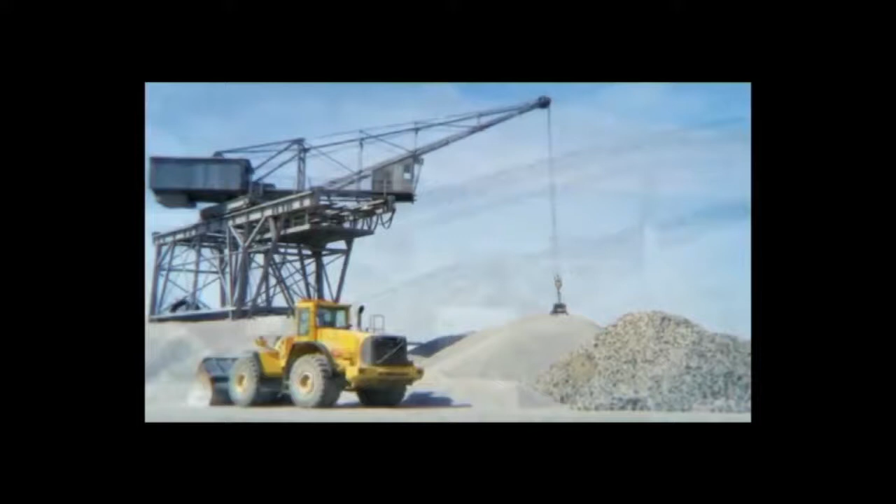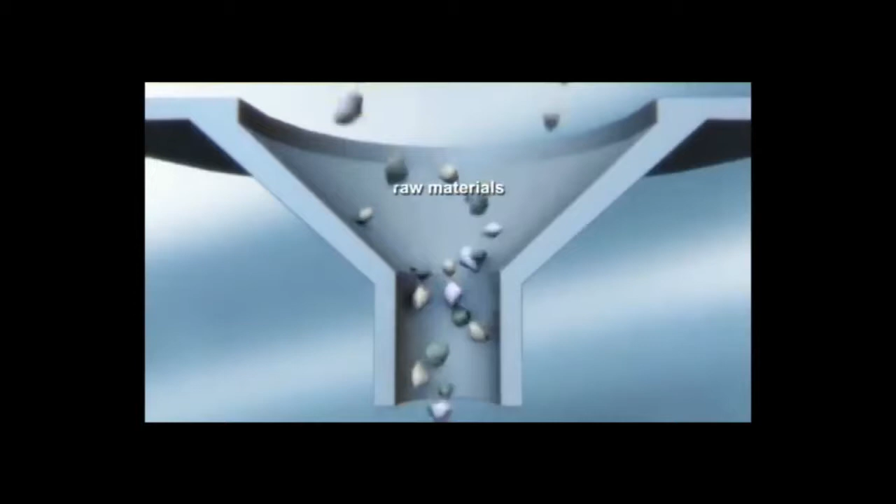The feedstocks used for the manufacture of cement are the natural raw materials limestone and clay. These are broken down in crushers into fragments of about 1 kilogram and then ground in a raw mill, together with smaller amounts of iron ore and quartz sand to obtain a fine meal.

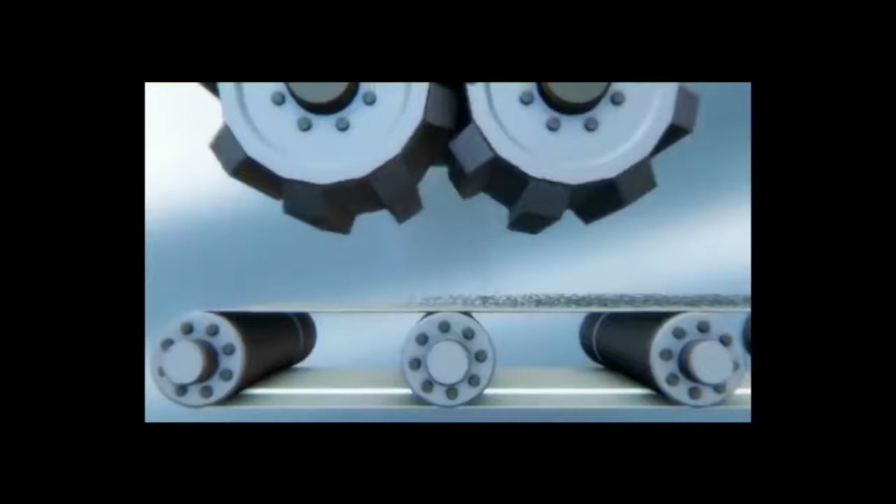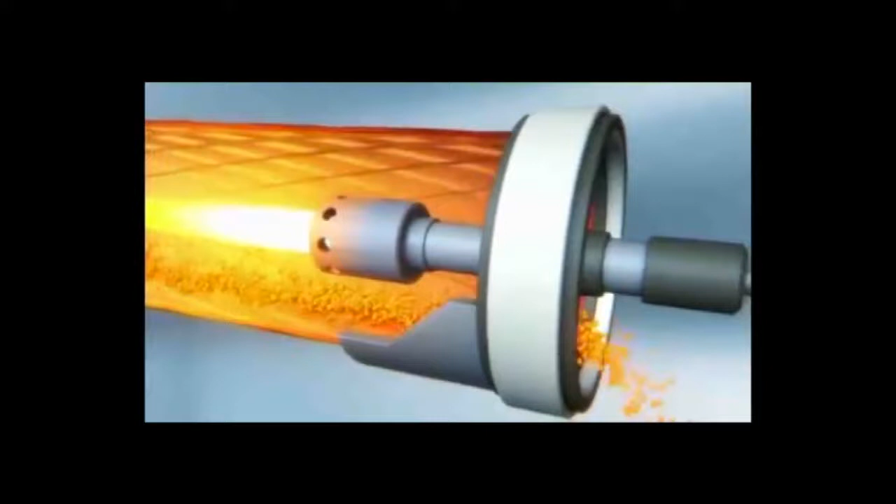At the same time, they are dried with the hot kiln exhaust gases from the incineration process. This raw mix is then transferred to a rotary kiln and fired at temperatures of about 1450 degrees Celsius to produce round-like particles measuring about 3 centimeters, known as cement clinker. Sintering is the name used by experts to describe this important process, which needs an enormous amount of energy.

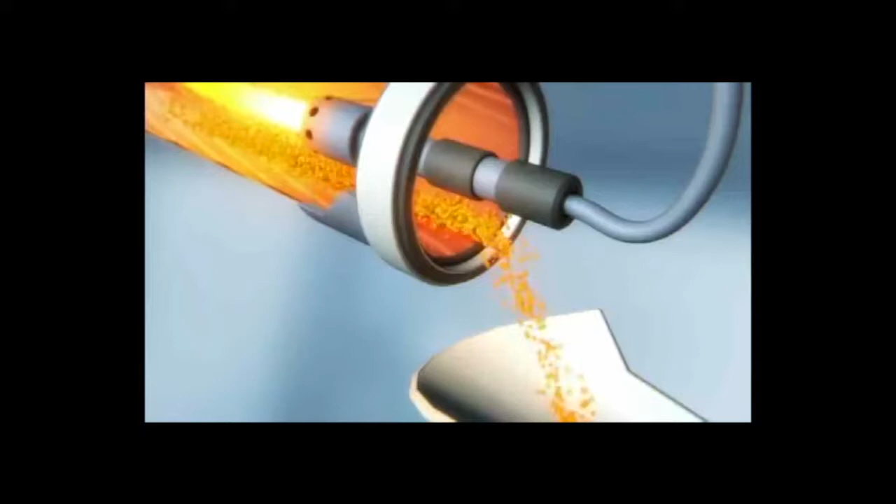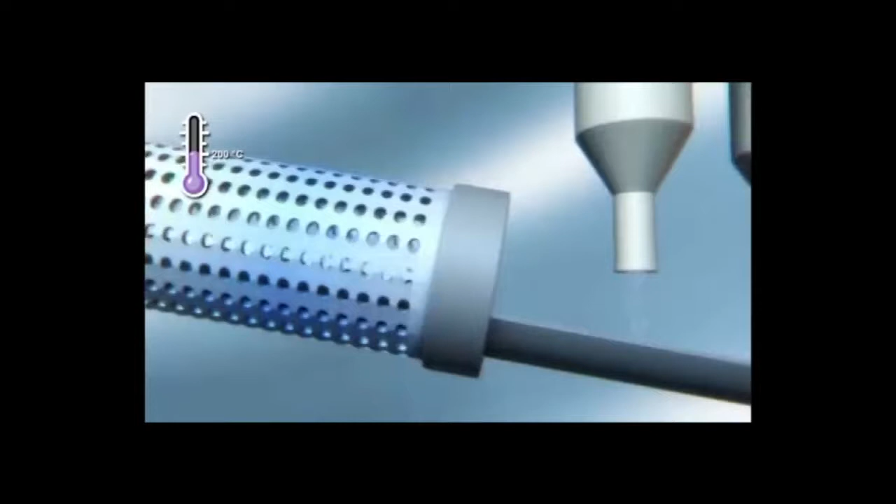In this incineration process, chemical compounds are formed which later cause the cement to harden when mixed with water. After the incineration process, the cement clinker drops out of the kiln and is cooled to about 200 degrees Celsius in a grate cooler. After adding gypsum or anhydrite and sometimes further ground additives like slag, fly ash and limestone,

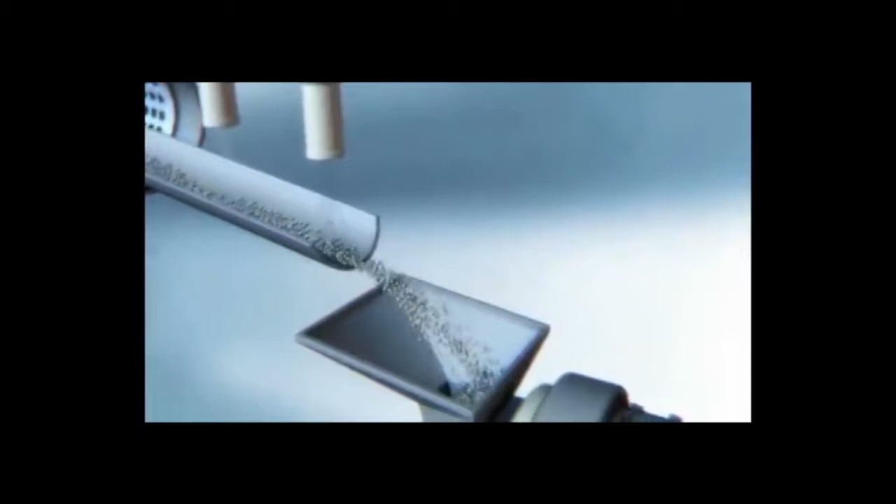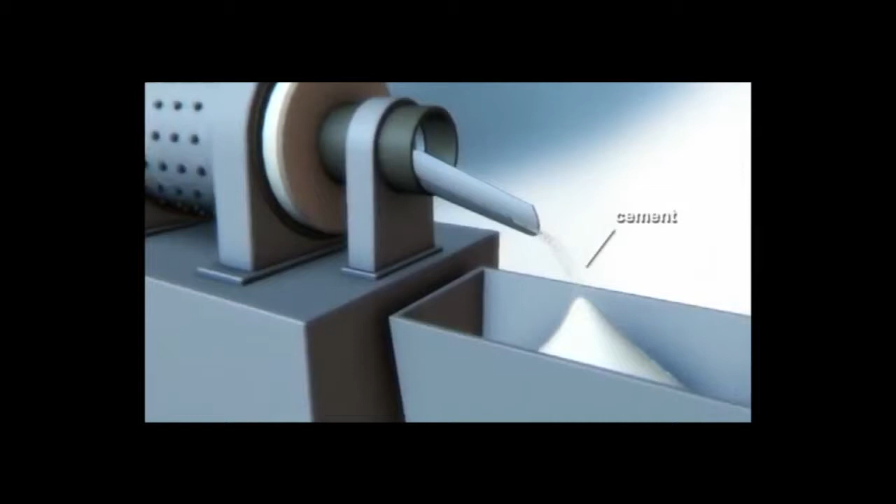the clinker is ground in mills to produce fine cement. The quantity and type of the additives influence the chemical and physical properties of the cement. The cement is stored in silos and is mostly supplied to concrete manufacturers as bulk material for further processing.

Concrete consists mainly of a mixture of cement, water and aggregates such as sand, gravel and crushed rocks. At the concrete manufacturing plant, the cement powder from the storage silo is transferred to the mixer. All the concrete components are weighed exactly before being added to the concrete mixer for a specified time.

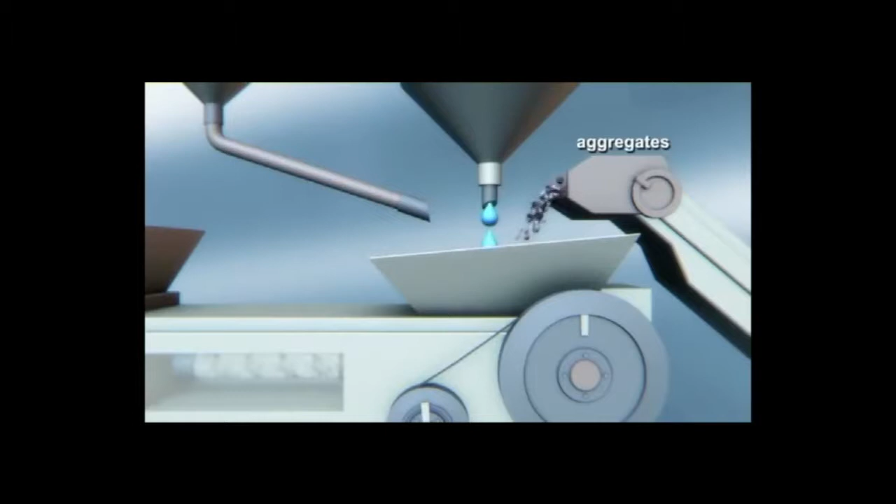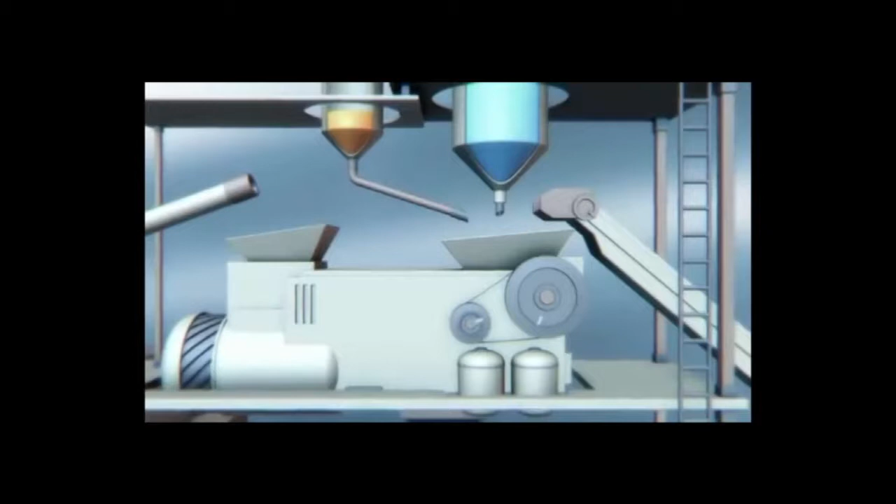Finally, the chemical admixture like the superplasticizer Glenium is added. In this process, the cement water mixture slurry becomes the glue, also known as cement paste, that holds the aggregates together. The fresh concrete mass then flows into mixer vehicles to be transported to the construction site.

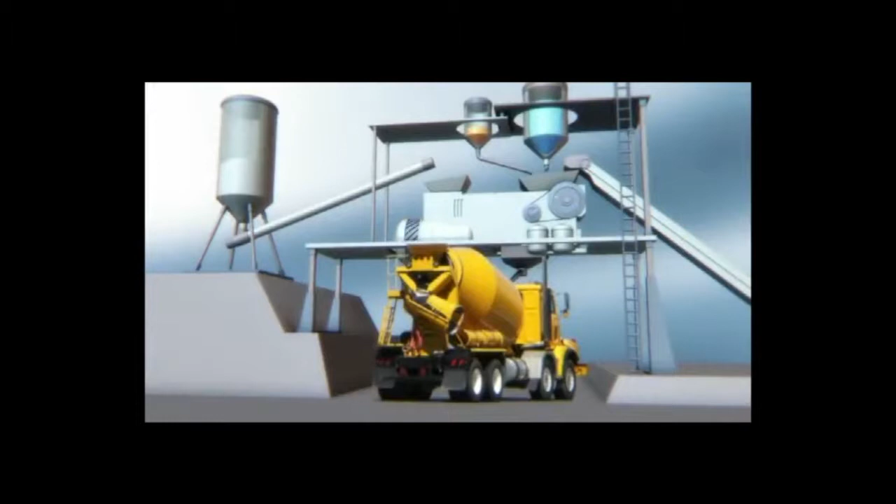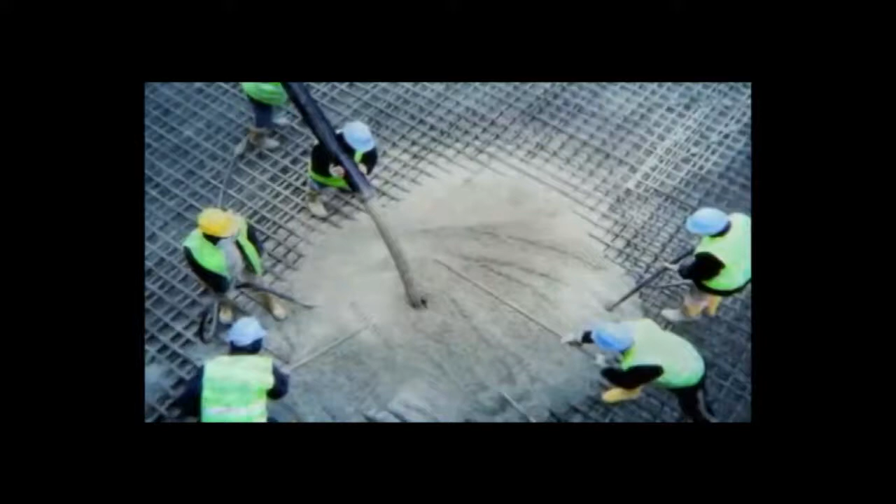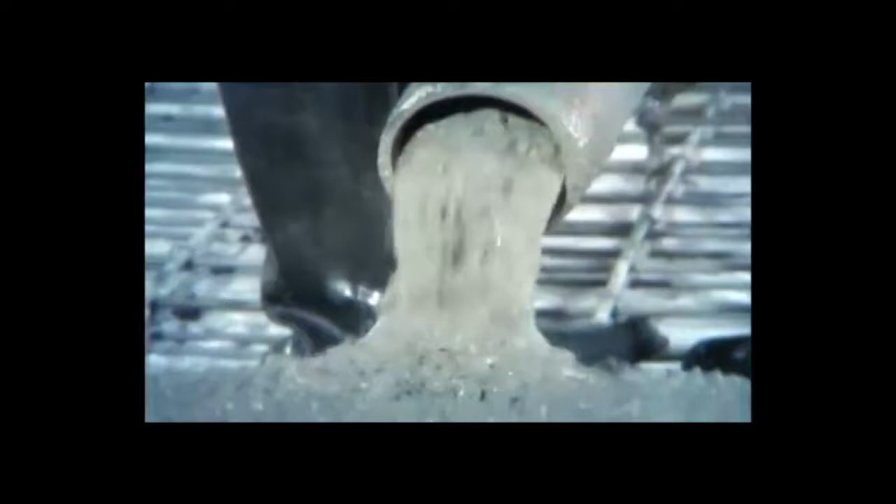The properties of concrete can be specifically varied by using different mixture proportions and admixtures. The admixture Glenium, for example, increases the flowability of the concrete so that the densely packed steel reinforcement bars of a foundation can be coated quickly and completely with concrete within a short time.

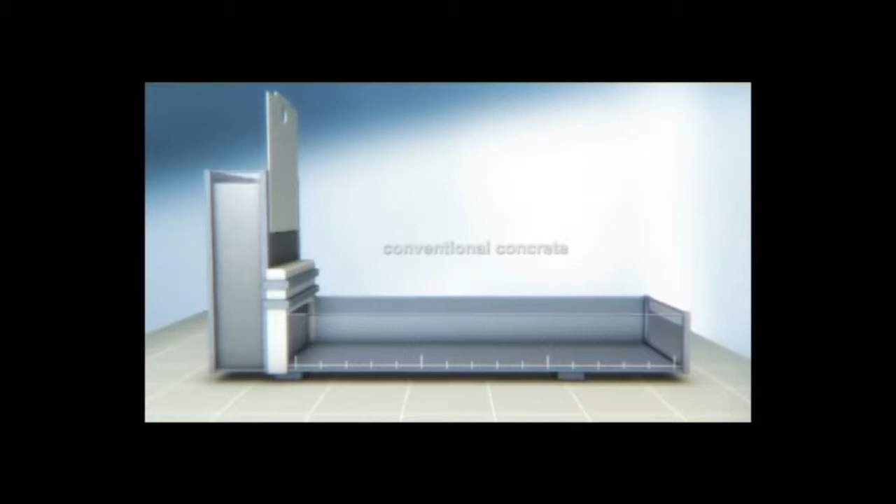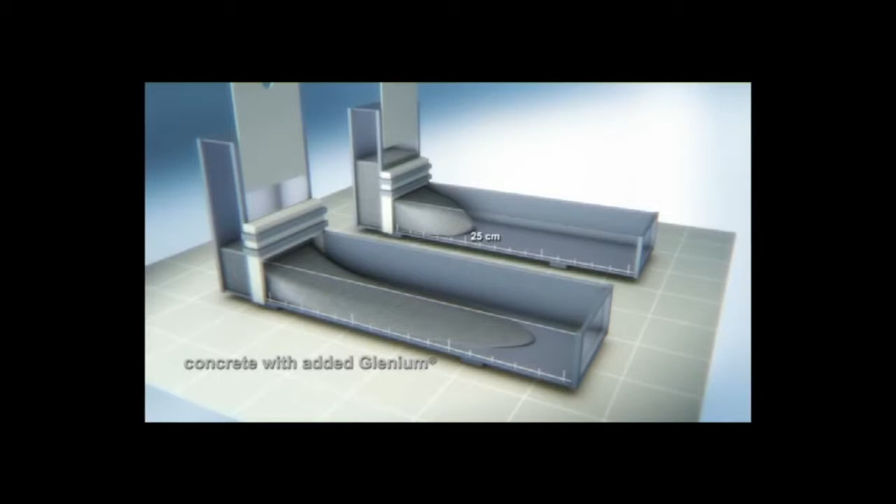A pilot plant comparative study between conventional concrete and concrete with added Glenium, but with the same water content and mixing ratio, clearly shows: with conventional concrete, the flow process already stops after 5 seconds and after a distance of about 25 centimeters. Concrete to which the superplasticizer Glenium was added flows much faster, and the distance travelled over the same period is about 65 centimeters.

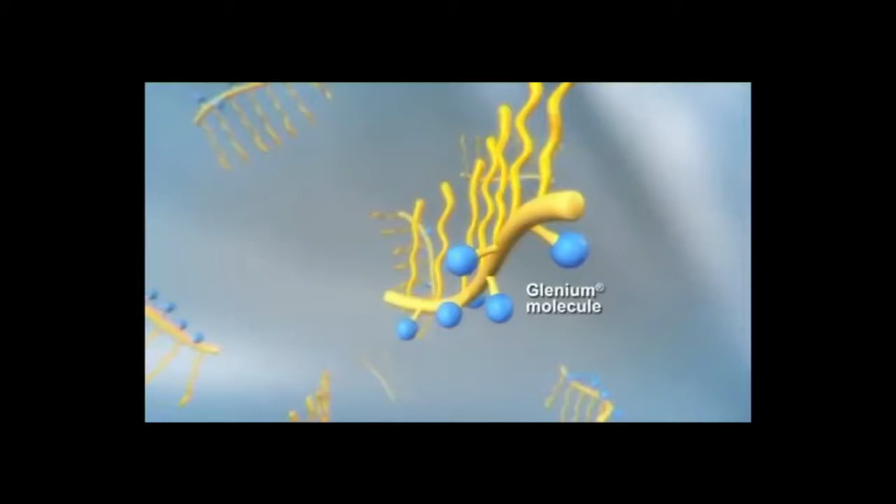Modern superplasticizers like Glenium are based on synthetic organic polymers such as polycarboxylate ether, called PCE for short. A PCE molecule consists of one long main chain and shorter side chains. The main chains are negatively charged.

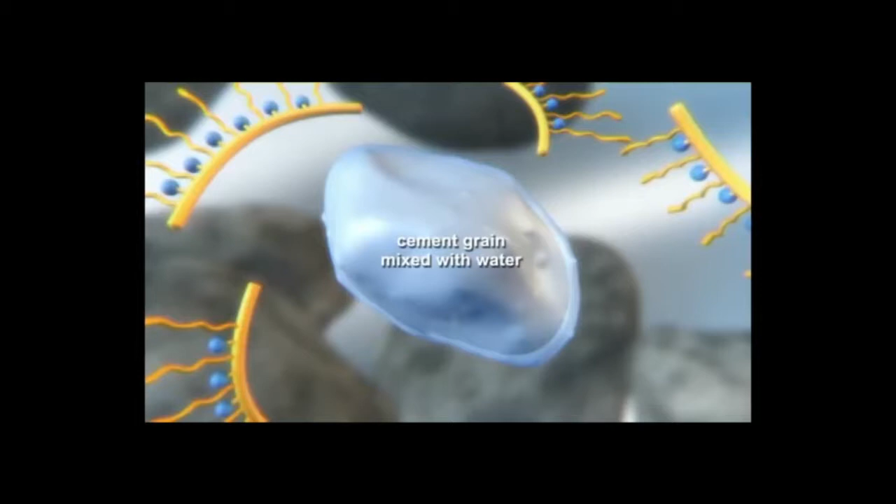When cement is mixed with water, it reacts and starts to form crystalline needles that interlock with each other to form a hard, rock-like substance. When the PCE molecules are mixed with liquid concrete, they are adsorbed onto the surfaces of the particles contained in the concrete. The side chains of the molecules point outwards, like the spines of a chestnut burr, and hold the particles at a distance to each other.

This makes it easier for them to move against each other, and the concrete becomes more fluid. Concrete can be given the desired properties by varying the length of the main and side chains.

BASF, the chemical company. Yes, I think it's a very nice movie. In just 5 minutes, you have the overall view starting from the cement production into the concrete, and then you end with the mixture. Have you understood everything?

Do I need the microphone? Yes? That's better?

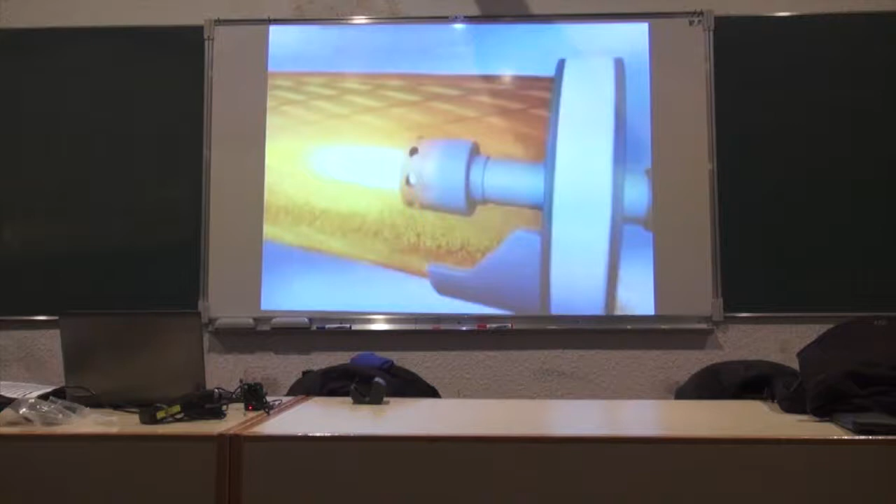The feedstocks used for the manufacture of cement are the natural raw materials limestone and clay. These are broken down in crushers into fragments of about 1 kilogram and then ground in a raw mill, together with smaller amounts of iron ore and quartz sand to obtain a fine meal. At the same time, they are dried with the hot kiln exhaust gases from the incineration process. This raw mix is then transferred to a rotary kiln and fired at temperatures of about 1450 degrees Celsius to produce round-like particles measuring about 3 centimeters, known as cement clinker. Sintering is the name used by experts to describe this important process, which needs an enormous amount of energy.

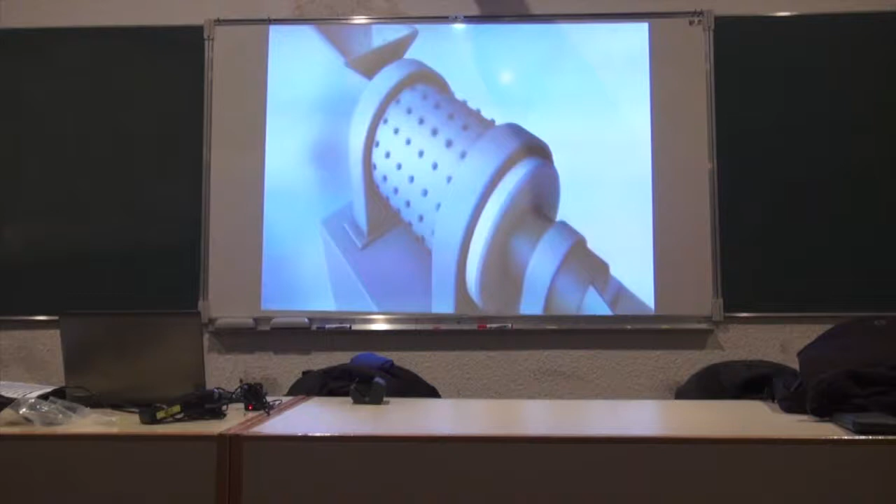In this incineration process, chemical compounds are formed which later cause the cement to harden when mixed with water. After the incineration process, the cement clinker drops out of the kiln and is cooled to about 200 degrees Celsius in a grate cooler. After adding gypsum or anhydrite and sometimes further ground additives like slag, fly ash and limestone, the clinker is ground in mills to produce fine cement. The quantity and type of the additives influence the chemical and physical properties of the cement. The cement is stored in silos and is mostly supplied to concrete manufacturers as bulk material for further processing.

So, let's start with the first question. What are the two natural materials used for the manufacture of cement?

I think, yes, the natural materials, the raw materials. Clay, I think it's also better. Then we will do a little one at the end for the note, but it's good also to exchange like this. So, clay, and clay is argile. And limestone.

Lime, something there is not wrong, it's true even, but that was not in the raw materials that we put in the clinker. I've heard about gypsum, and you're right, you're correct. Gypsum is also a natural material used for cement manufacture. It's used for regulation of the setting of the cement. So these are the words you need to understand and keep in mind: the setting of the cement. So gypsum is used as a regulator for the setting of the cement, but in the clinker we are using two raw materials.

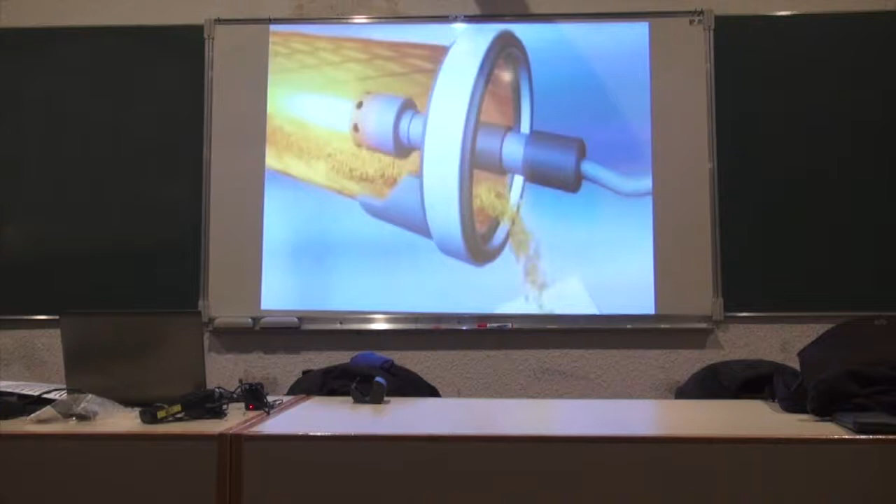This raw mix is then transferred to a rotary kiln and fired at temperatures of about 1,450 degrees Celsius to produce round-like particles measuring about 3 centimeters, known as cement clinker. Sintering is the name used by experts to describe this important process, which needs an enormous amount of energy. In this incineration process, chemical compounds are formed which later cause the cement to harden when mixed with water.

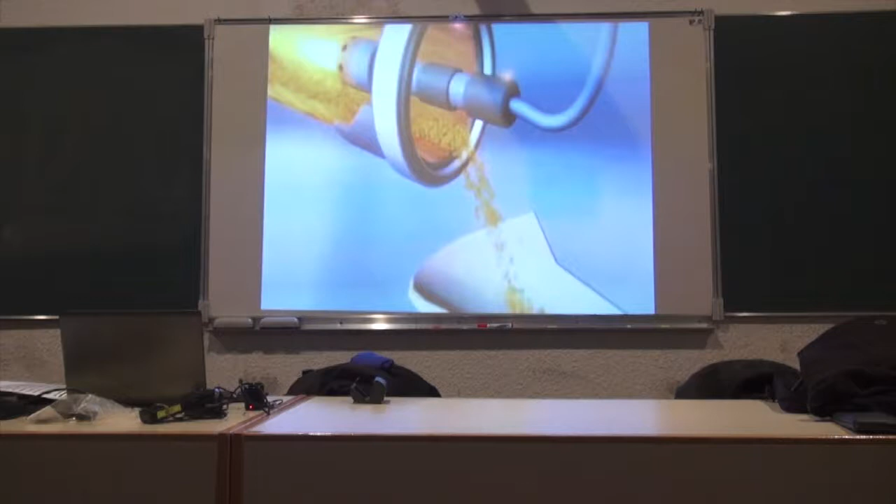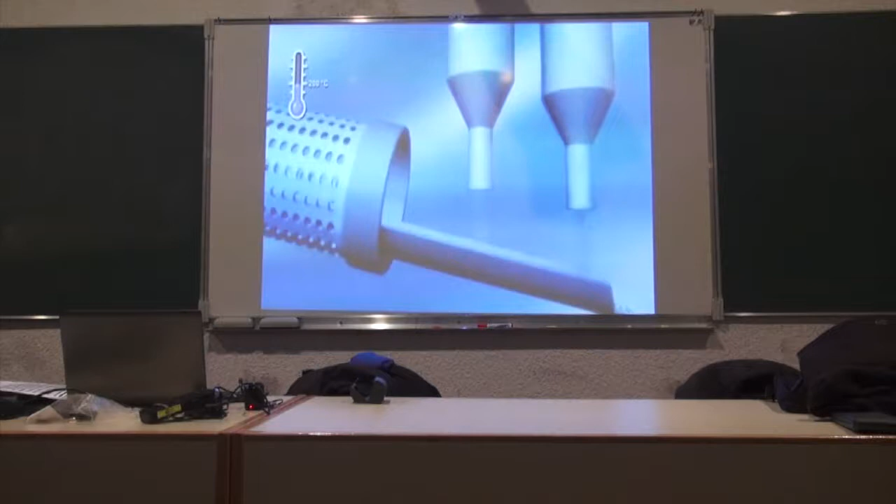After the incineration process, the cement clinker drops out of the kiln and is cooled to about 200 degrees Celsius in a grate cooler. After adding gypsum or anhydrite and sometimes further ground additives like slag, fly ash and limestone, the clinker is ground in mills to produce fine cement.

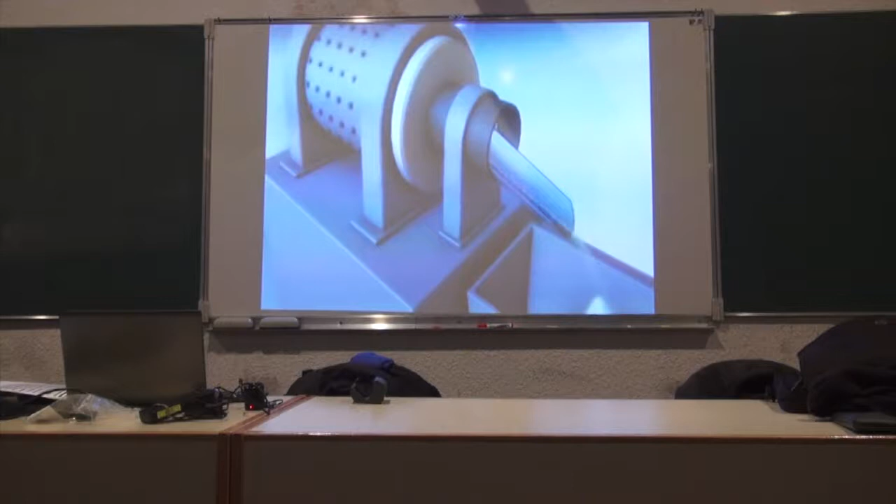The quantity and type of the additives influence the chemical and physical properties of the cement. The cement is stored in silos and is mostly supplied to concrete manufacturers as bulk material for further processing.

Are you ready to go to the concrete plant now? The batching plant, concrete batching plant, ready-mix concrete, aggregates. Let's see all this.

Concrete consists mainly of a mixture of cement, water and aggregates such as sand, gravel and crushed rocks. At the concrete manufacturing plant, the cement powder from the storage silo is transferred to the mixer. All the concrete components are weighed exactly before being added to the concrete mixer for a specified time. Finally, the chemical admixture like the superplasticizer Glenium is added. In this process, the cement-water admixture slurry becomes the glue, also known as cement paste, that holds the aggregates together. The fresh concrete mass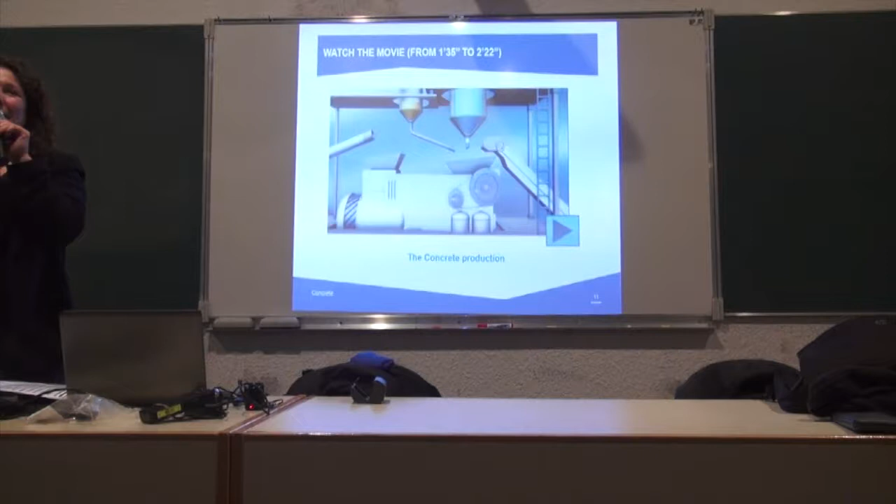Concrete consists mainly of a mixture of cement, water and aggregates such as sand, gravel and crushed rocks. At the concrete manufacturing plant, the cement powder from the storage silo is transferred to the mixer. All the concrete components are weighed exactly before being added to the concrete mixer for a specified time. Finally, the chemical admixture like the superplasticizer Glenium is added. In this process, the cement-water mixture slurry becomes the glue, also known as cement paste, that holds the aggregates together. The fresh concrete mass then flows into mixer vehicles to be transported to the construction site.

What are the three materials considered as aggregates? I have the three, I would just add a fourth one that is not, but thank you. Gravel, sand, and crushed rocks. Thank you, great. Again, there is a fourth one that is not

as aggregate, that is not in this movie, and we will talk about it. Thank you, madam. I wanted to speak about recycled concrete. Very good, we will talk about this after with the circular economy - reusing what has been deconstructed or demolished, into the concrete again. That will be another kind of aggregate called recycled concrete. Thank you.

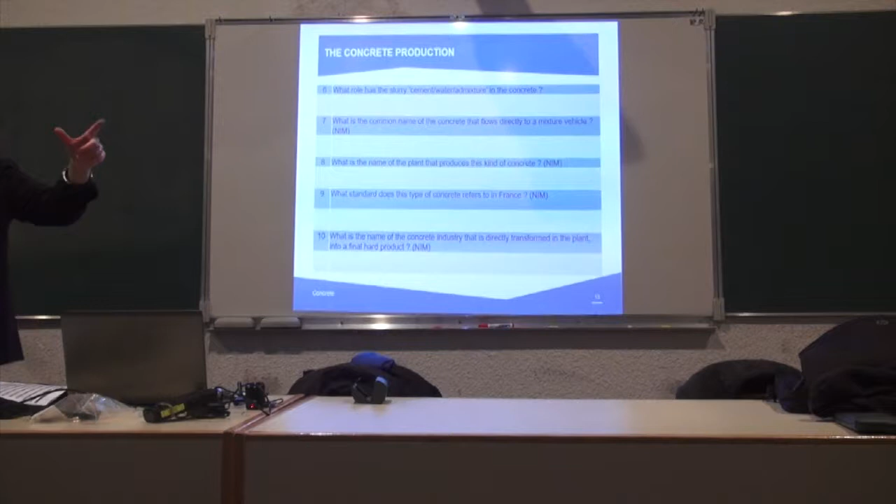Slurry. With cement you can do concrete, mortar, and slurry. If you have only cement and water, it's a slurry, an admixture, un coulis — une pâte de ciment, un coulis. Slurry, c'est barbotine aussi, c'est aussi le mot barbotine. Slurry, c'est pour tout, par exemple les coulis d'injection. So that is another important word.

If you go on consolidation for soils, you will inject some slurry. And what is the role of this slurry in the concrete? To make it glue. And what is the common name of the concrete that flows directly to a mixture vehicle?

In French, it's béton prêt à l'emploi. In English, I say the word many times in order for you to integrate that. Prêt à l'emploi, béton prêt à l'emploi — ready to use. It's really like do it yourself, DIY, but now it's ready mix concrete. BPE pour béton prêt à l'emploi, RMC for ready mix concrete. So if you see on the document RMC, it means béton prêt à l'emploi, like BPE in French.

And what is the name — this word also I repeated sometimes — of the plant where you produce this kind of ready mix concrete? It's a plant. Do you know what is a plant? No? A factory. A plant is a factory, it's a place where we do things. Une usine, a plant.

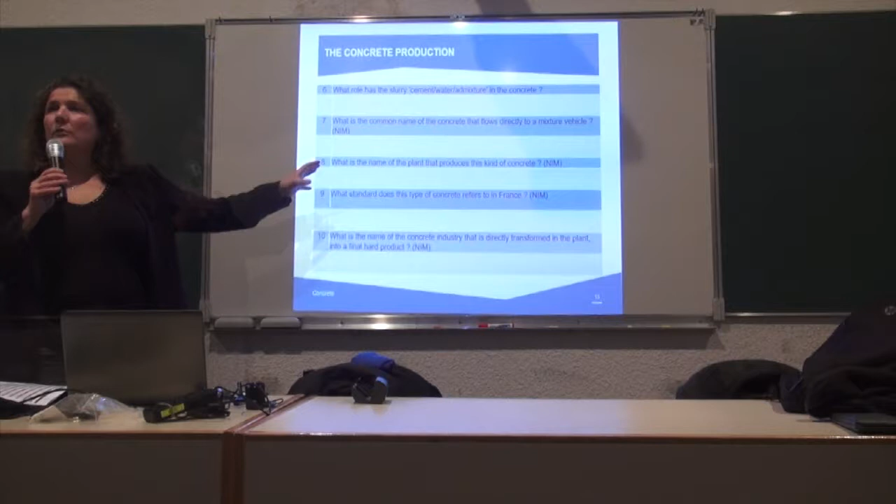So where do we do the ready mix concrete? It is done in a concrete batching plant. These are important words if you want to work in concrete in foreign countries in the future. Ready mix concrete, pour béton prêt à l'emploi, and batching plant is the unit, also called unit of production. Plant, unit, batching plant or batching unit.

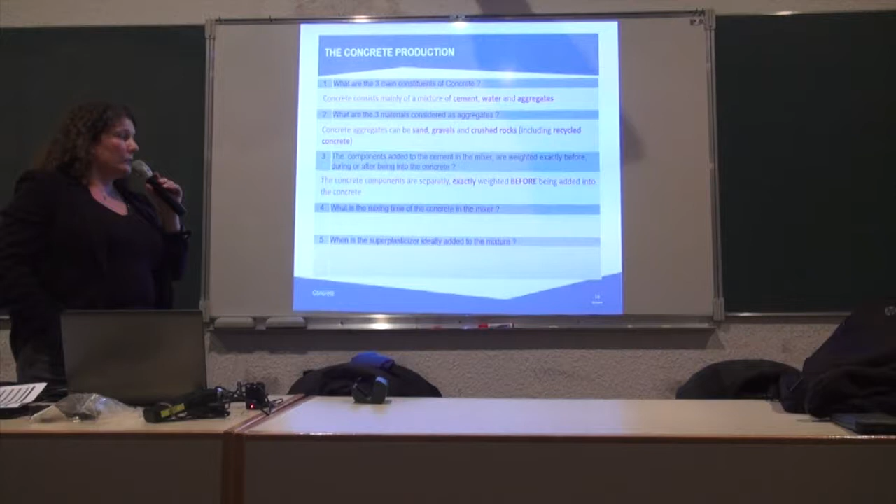The components added to the cement in the mixer are weighed exactly before being added into the concrete. The time for mixing the concrete is a specified time, no universal time. It depends on several factors, including the mix design, the mixer, the power of the mixer, and so on, the size of the aggregates, and many different parameters that will specify your mixing time.

When this superplasticizer is added to the mixture, ideally it is added at the end, because it reduces the absorption of the superplasticizer with water by the aggregate and increases its performance.

The role of the slurry is the glue, and the cement paste that binds the aggregates together in the concrete.

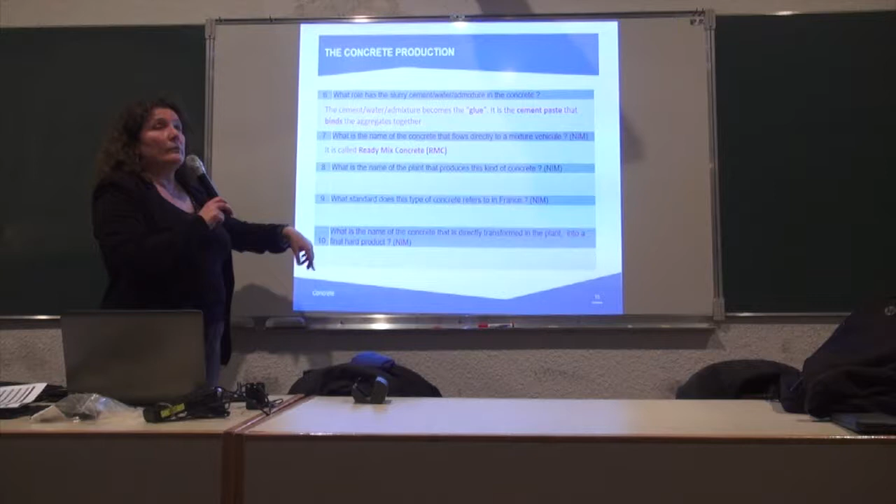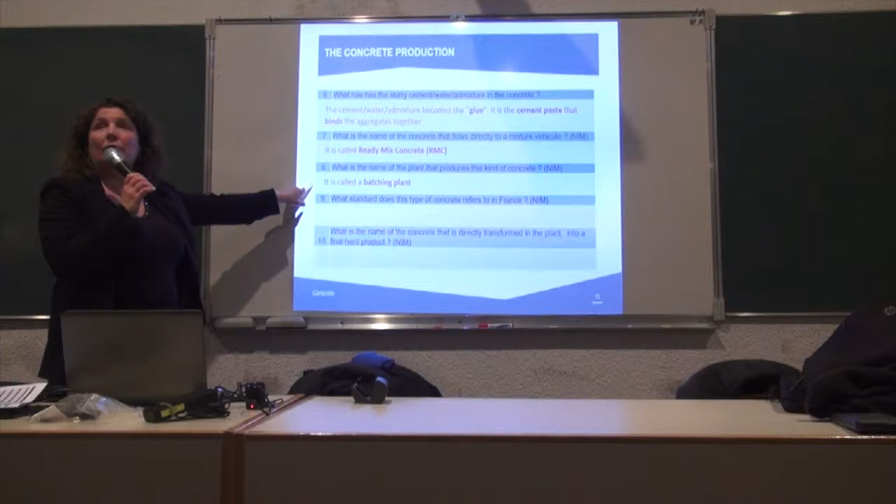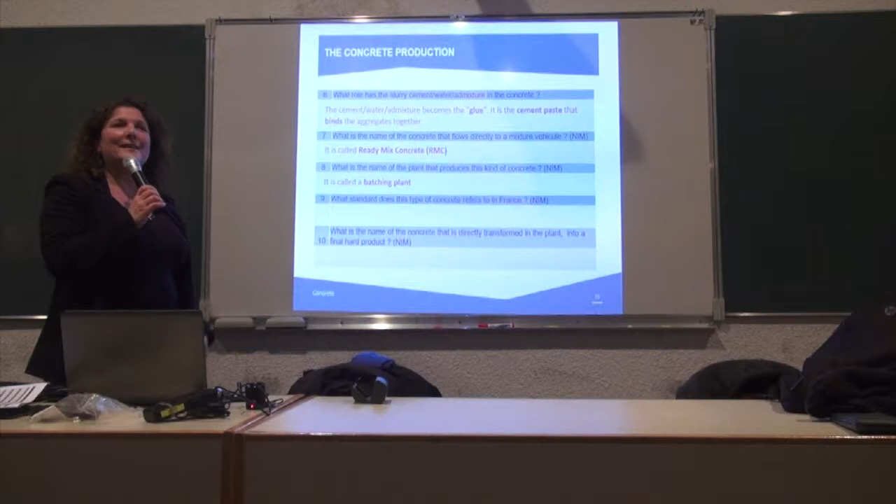The name of the concrete that flows directly, so this is the job, the industry of Agnés, is the ready-mix concrete, RMC, and the batching plant is the name of the plant or the unit where we do this concrete. Batching, you need to pronounce it like this - it's not easy to say batching plant. You insist on the batch, and then the end comes easily.

The standard is EN 206/CN for the French national complement, and then the precast concrete.

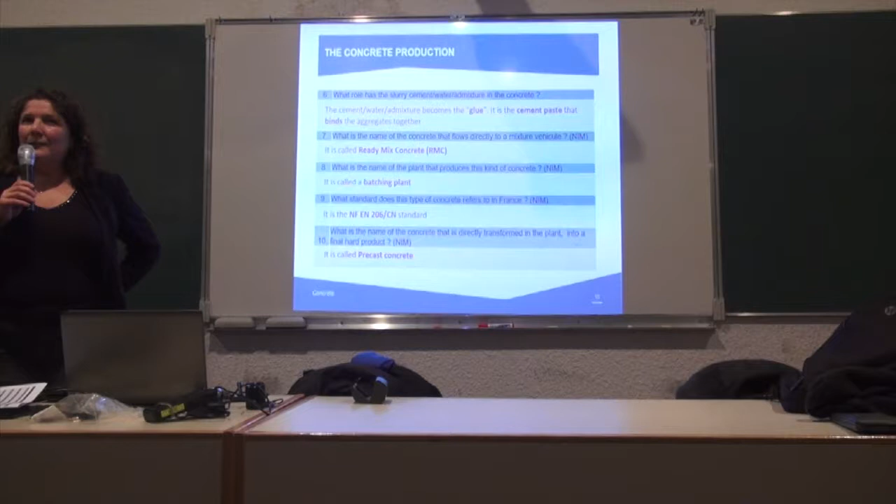We will watch again this part of the movie. Do you want? I want you to watch it. It's only 1 minute with all this vocabulary, and then you will understand it better.

Concrete consists mainly of a mixture of cement, water and aggregates such as sand, gravel and crushed rocks. At the concrete manufacturing plant, the cement powder from the storage silo is transferred to the mixer. All the concrete components are weighed exactly before being added to the concrete mixer for a specified time.

Finally, the chemical admixtures like the superplasticizer glenium is added. In this process, the cement-water admixture slurry becomes the glue, also known as cement paste, that holds the aggregates together. The fresh concrete mass then flows into mixer vehicles to be transported to the construction site.

Mix design, it's important to have this word. Mix design is the proportion, the mix you are doing on your concrete for a purpose. We talked about blended cement, assemblage. Mix design is the specific proportion of cement, aggregate, and admixture in order to get one property or several properties. You will often see this mix design word.

Let's go on environment. As you know, concrete is not always seen as environmental friendly. Environment is one focus for the economy, the concrete industry. If we don't focus on our impact on the environment, we will not survive. This is definitely today an industry that is not taking care of its environment will not survive. So it's many years now that the cement factories are making what they can in order to decrease their environmental impact.

And then the concrete also is now, since several years again, making the most of what they can do in order to reduce the resources they will use and to reduce as much as they can their impact on the environment. Before we were doing a project from the beginning to the end, and then after the end, we did not know what happened. You just throw in your bin, you were drinking a Coke, your tin, you just throw your tin in the bin.

But now, even today in your house, you are thinking, what will be the following of the life of your bin, of your tin? Your Coke tin or your telephone. You know that when you will no more use it, it does not disappear like this. There is something. So what is now, instead of a linear economy, we are trying to make a circular economy. That means that after the end of its life, it's not more really the end of its life. You will maybe use it again for something else.

So this is how we go into a circular economy, and every industry has to think about this as maximum as they can. And here you will see a movie for the concrete industry, cement and concrete industry, how they are now making their own circular economy also in order to reduce their impact on the environment. This is an Irish movie. You will hear the little Irish accent, but it's not too strong.

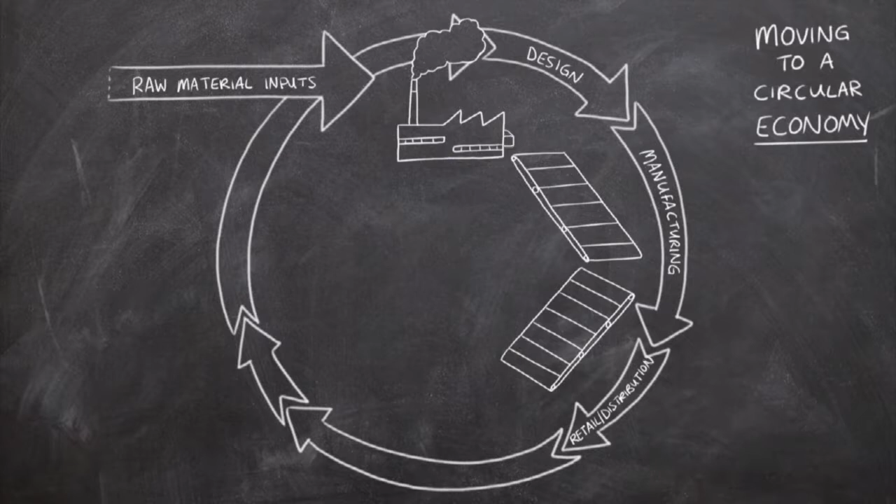In the same way, businesses are trying to make their operations more efficient and make their processes more circular by using the same limited resources over and over again. So, instead of making products that get used and thrown away, they're looking at ways to design products and systems to encourage return, recovery, and reuse of the same resources to make new products.

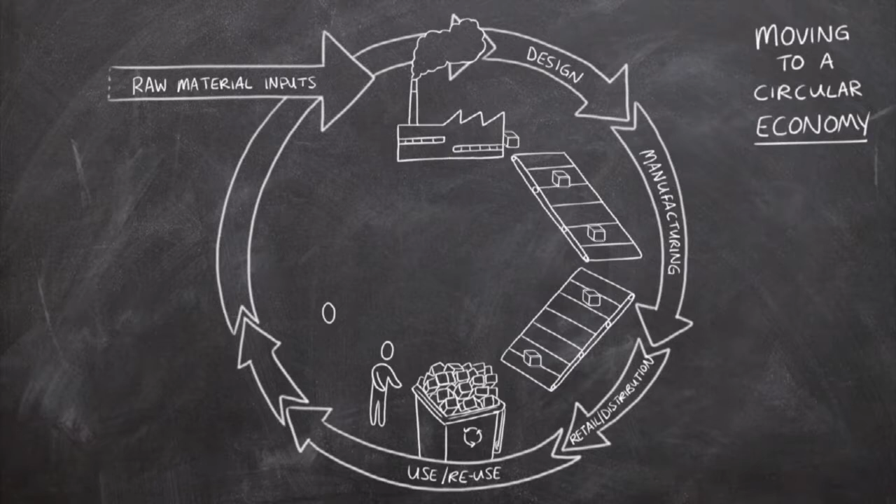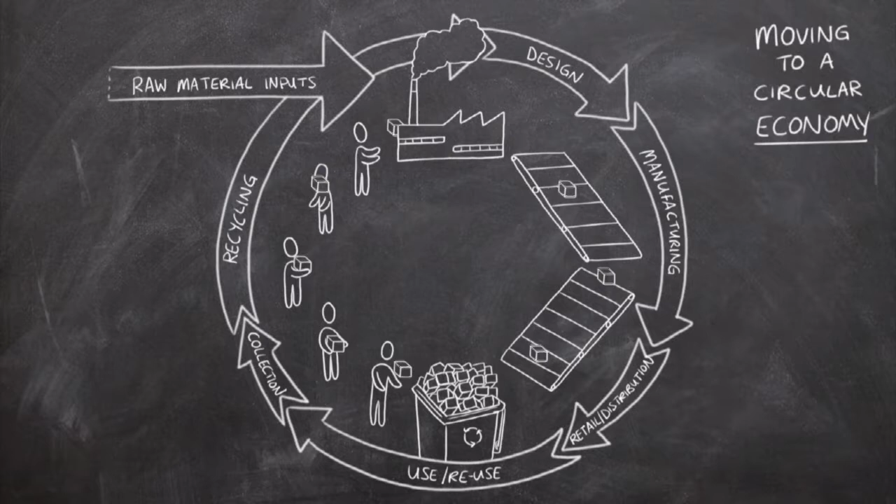To ensure we make the best possible use of resources, the challenge is that we must make products that are durable, that can be repaired or refurbished, reused or recycled. In that way, not only are less resources needed, but consumers are also actively engaged in helping to keep the resources flowing around the system.

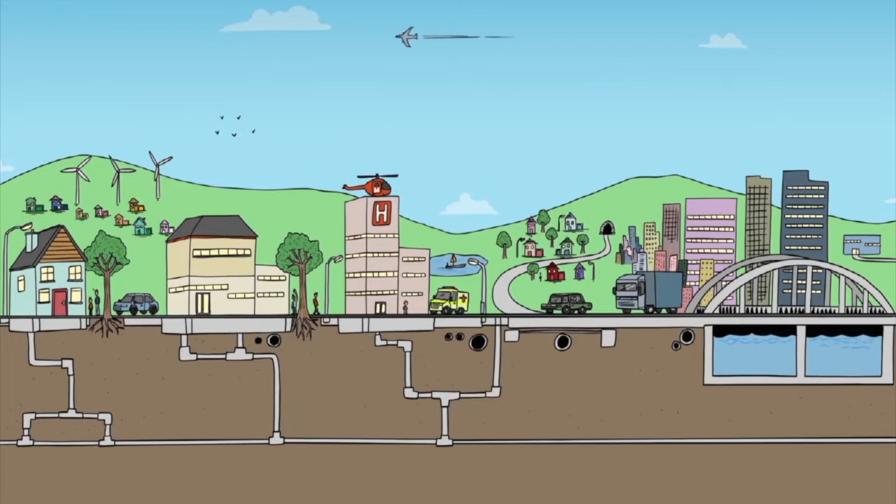Let's look at concrete. After water, concrete is the second most used substance on Earth, and like water, it is essential for modern life. Can you imagine the world without concrete? Even though you may not think about it, we have come to rely on concrete. It is all around us in the built environment.

Concrete fulfills many of the requirements of the circular economy. It is manufactured from local materials. It is durable. Many of the buildings, bridges, dams and tunnels we use today were constructed decades ago using concrete. That is an efficient use of resources.

Concrete structures can be repaired and refurbished. Again, an efficient use of resources because with minimal intervention, the life of the building can be extended or it can be adapted for other uses. And eventually, at the end of its life, the concrete in the building can be recycled back into new construction projects. Concrete is 100% recyclable.

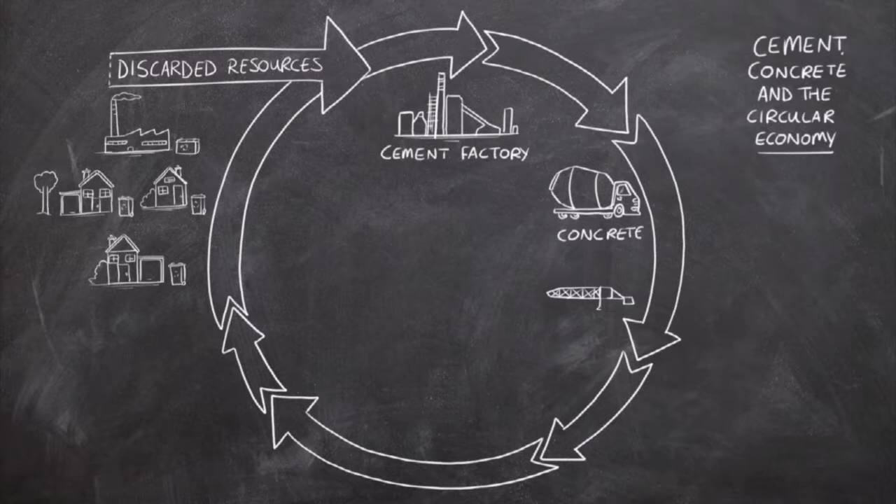Cement, one of the key ingredients in concrete, has been playing a significant role in the circular economy for decades. Millions of tons of discarded resources from other industries and from households are recovered and reused in cement kilns each year, both as fuel and raw materials. The advantage of using this waste is that not only are these resources reused, but their use directly reduces the need for fossil fuels and virgin raw materials, and also improves the environmental performance of the industry.

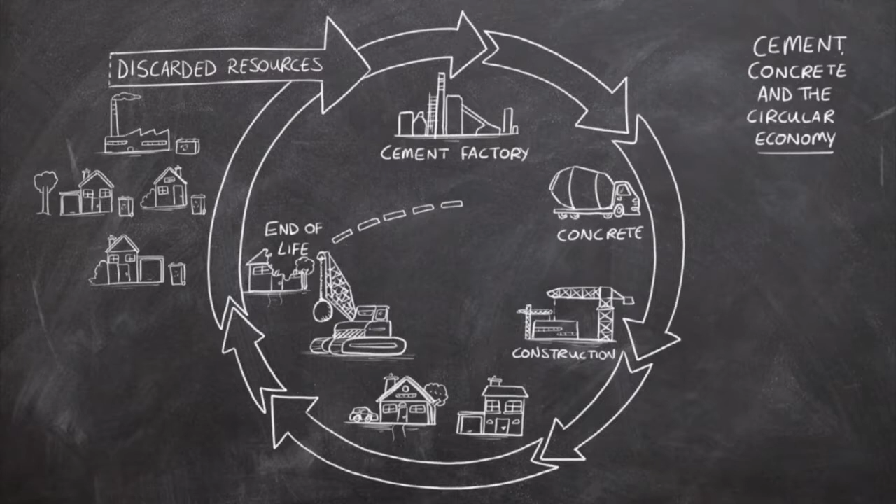Helping to close the loop like this by cycling these valuable resources is exactly what happens in nature, where the reuse of waste from one part of the system benefits the whole system. The cement and concrete industries are vital to maintaining a durable, resilient built environment which supports the circular economy principles.

As the global population increases, concrete is one of the key building materials providing the new homes, schools, factories, transport infrastructure, power generation facilities, coastal and flood protection that we need. Shaping the future through clever design with concrete construction will deliver comfortable and secure homes and the infrastructure for the smart cities of the future, while helping to ensure we manage the finite resources of our planet.

The circular economy has the potential to really transform business and our way of life by inspiring a new partnership between businesses and consumers, where resources are valued, the needs of our growing population are met, while also improving our stewardship of the earth.

So do you think you are improving your English now? Is it easier to understand? When you watch the movie, did you understand it? Yes, just a bit of training. I will give your teacher the link in order to watch the movie again for you. And it's online on YouTube. It's very important to regularly listen and practice, to watch these movies.

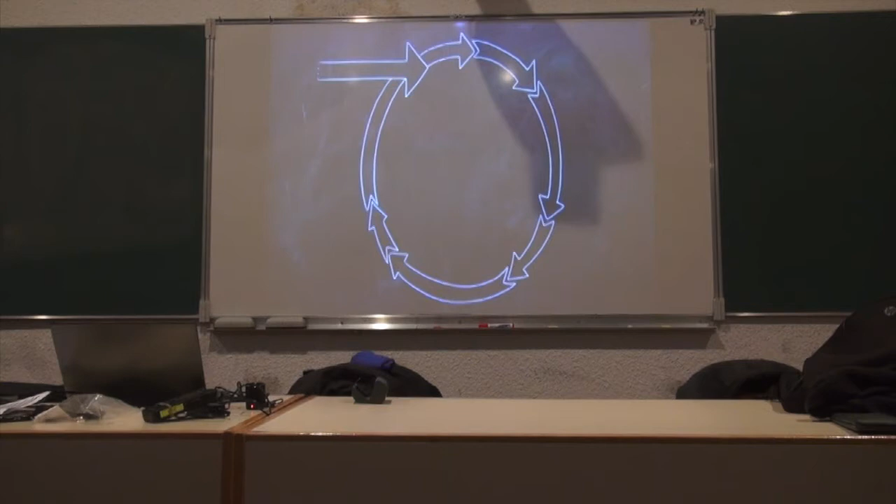The basic idea behind the circular economy is that in nature there is no waste. The whole system cycles the same nutrients over and over again. Like leaves falling from the trees in autumn, those nutrients go back into the soil where they are available to grow new leaves next spring.

In the same way, businesses are trying to make their operations more efficient and make their processes more circular by using the same limited resources over and over again. So, instead of making products that get used and thrown away, they're looking at ways to design products and systems to encourage return, recovery, and reuse of the same resources to make new products.

To ensure we make the best possible use of resources, the challenge is that we must make products that are durable, that can be repaired or refurbished, reused or recycled. In that way, not only are less resources needed, but consumers are also actively engaged in helping to keep the resources flowing around the system.

Let's look at concrete. After water, concrete is the second most used substance on Earth, and like water, it is essential for modern life. Can you imagine the world without concrete? Even though you may not think about it, we have come to rely on concrete. It is all around us in the built environment.

Concrete fulfills many of the requirements of the circular economy. It is manufactured from local materials. It is durable. Many of the buildings, bridges, dams and tunnels we use today were constructed decades ago using concrete. That is an efficient use of resources.

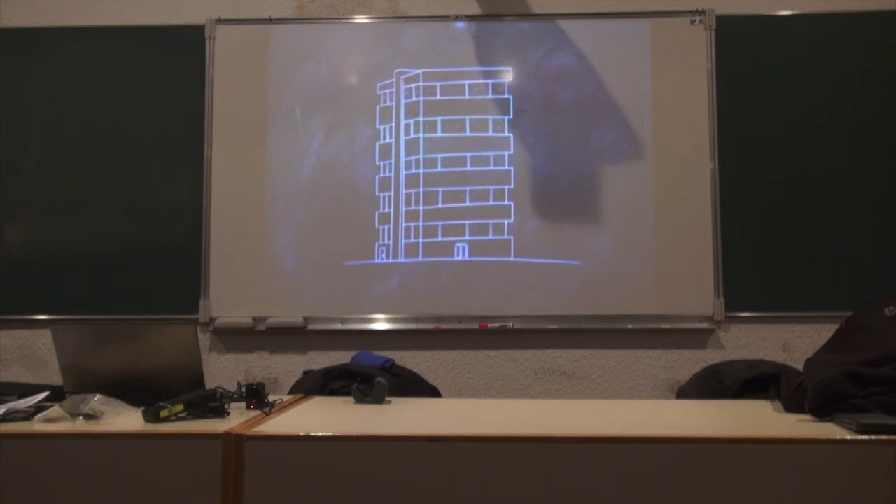Concrete structures can be repaired and refurbished. Again, an efficient use of resources because with minimal intervention, the life of the building can be extended or it can be adapted for other uses. And eventually, at the end of its life, the concrete in the building can be recycled back into new construction projects. Concrete is 100% recyclable.

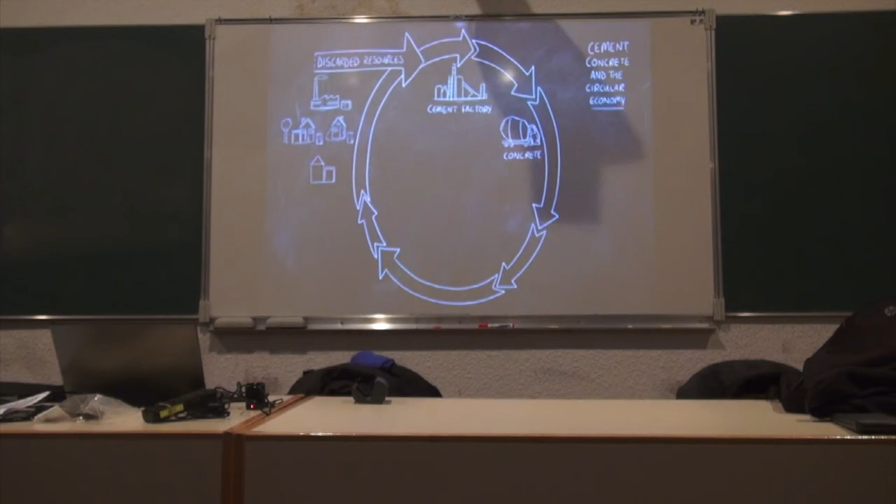Cement, one of the key ingredients in concrete, has been playing a significant role in the circular economy for decades. Millions of tons of discarded resources from other industries and from households are recovered and reused in cement kilns each year, both as fuel and raw materials. The advantage of using this waste is that not only are these resources reused, but their use directly reduces the need for fossil fuels and virgin raw materials, and also improves the environmental performance of the industry.

Helping to close the loop like this by cycling these valuable resources is exactly what happens in nature, where the reuse of waste from one part of the system benefits the whole system. The cement and concrete industries are vital to maintaining a durable, resilient built environment which supports the circular economy principles.

As the global population increases, concrete is one of the key building materials providing the new homes, schools, factories, transport infrastructure, power generation facilities, coastal and flood protection that we need. Shaping the future through clever design with concrete construction will deliver comfortable and secure homes and the infrastructure for the smart cities of the future, while helping to ensure we manage the finite resources of our planet.

The circular economy has the potential to really transform business and our way of life by inspiring a new partnership between businesses and consumers, where resources are valued, the needs of our growing population are met, while also improving our stewardship of the earth.